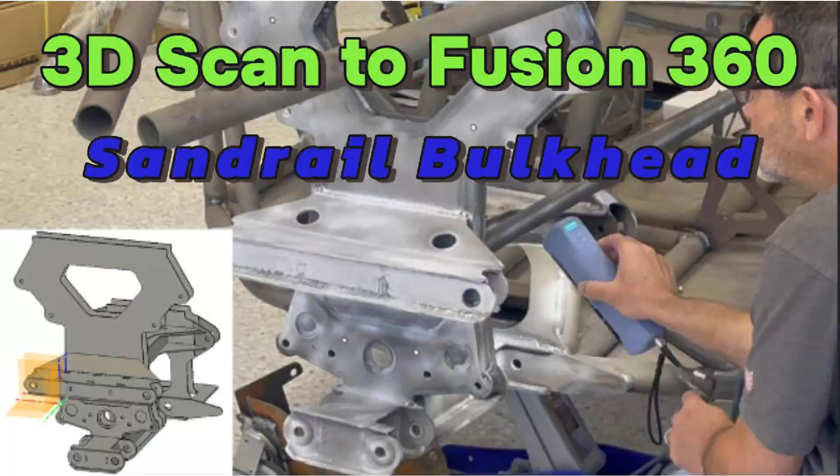All right, today we're using our Einstar 3D scanner to scan the bulkhead on this Desert Dynamics Sandcar. I'm not going to spend a lot of time showing the Einstar. There's a lot of videos on how to do the Einstar 3D scanning. We're going to quickly do the scan. I'm going to show you here scans showing up on the computer, and then we're going to show you how to get the mesh into Fusion 360.

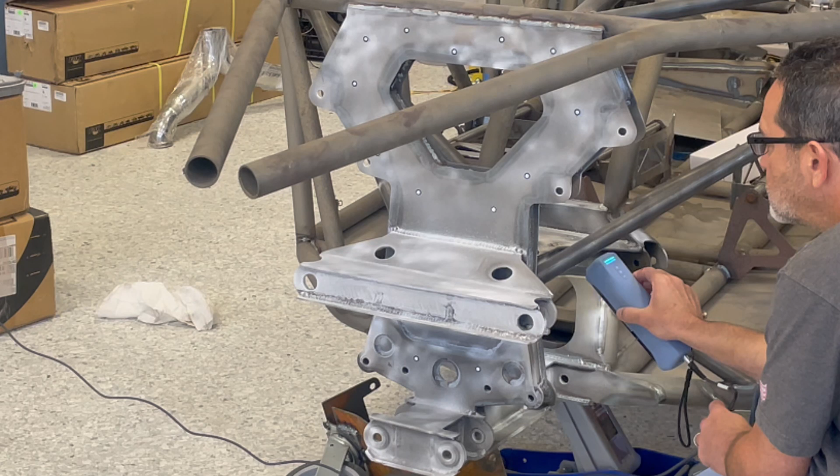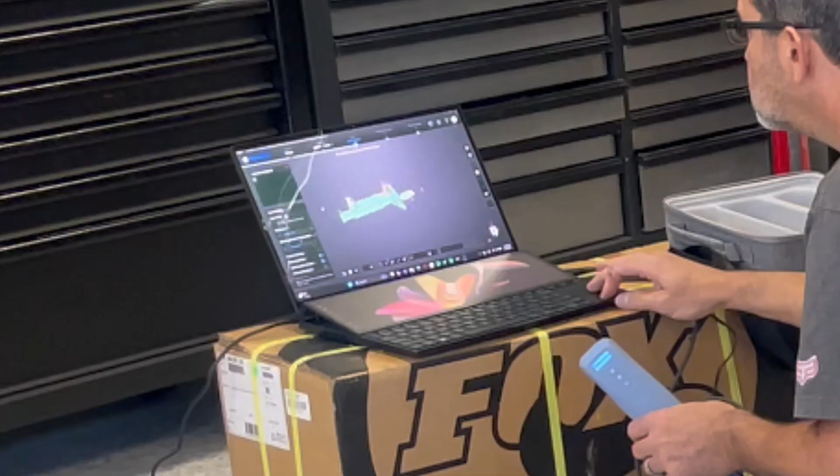So that's a critical component of getting it into Fusion 360 and figuring out how then to start making your components in Fusion 360. We'll just finish up the scan real quick, kind of go slow in some of the complex areas, get it saved into multiple files, and then we'll get going in Fusion 360.

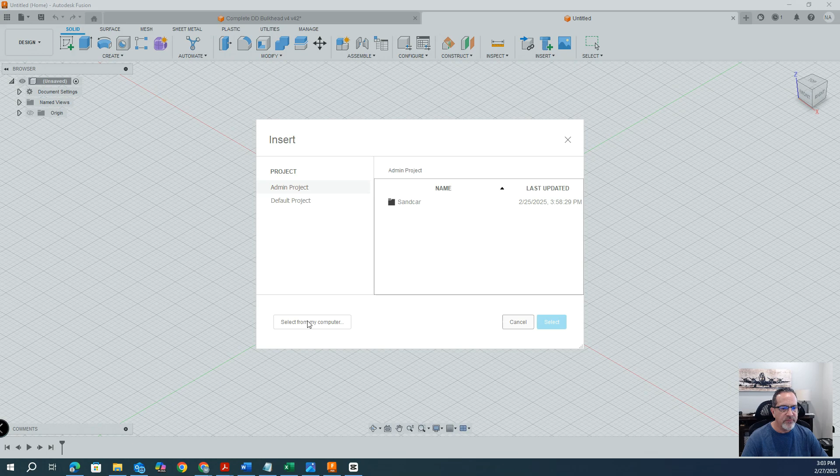Okay, now that we have the 3D scan saved, I'm going to show you how to get it into Fusion and get it to the point where you can work with it. So we're going to go up and we're going to do Insert Mesh, and then we're going to do Select from Computer. Look for your 3D scan. I have these broken up into a few different files just because they become really large otherwise. So let's just grab this one.

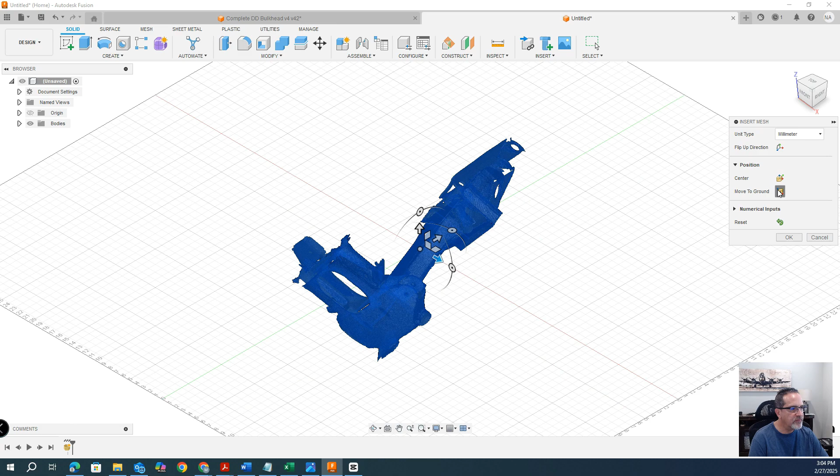Okay, you'll get this insert mesh screen over here on the right. Make sure that it's getting inserted the same that it was saved. So this was saved in millimeters. It doesn't matter if your sketch is going to wind up being in inches. My sketch is going to wind up being in inches, but the mesh was saved in millimeters, so we got to make sure it's in millimeters. We're going to center it on the drawing, move it to the ground. We're going to move it around afterwards anyway, but I'll show you how to do that.

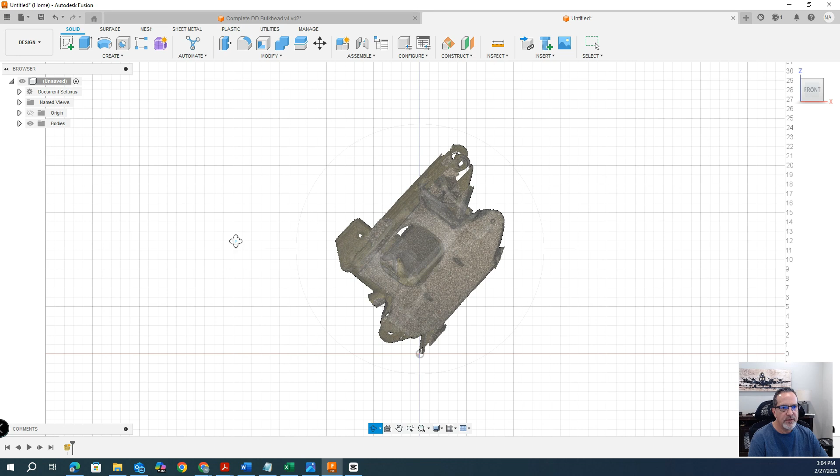Okay, so now our scanned image is in there. But you'll notice that it's not correct on the plane. So right now, if we draw on it, it's going to be very confusing. So what we want to do is go to the front here, and we're going to select this. We're going to move it. We're going to right mouse click, move or copy. And then that allows us to move this. And we're going to try to get it oriented first with that plane.

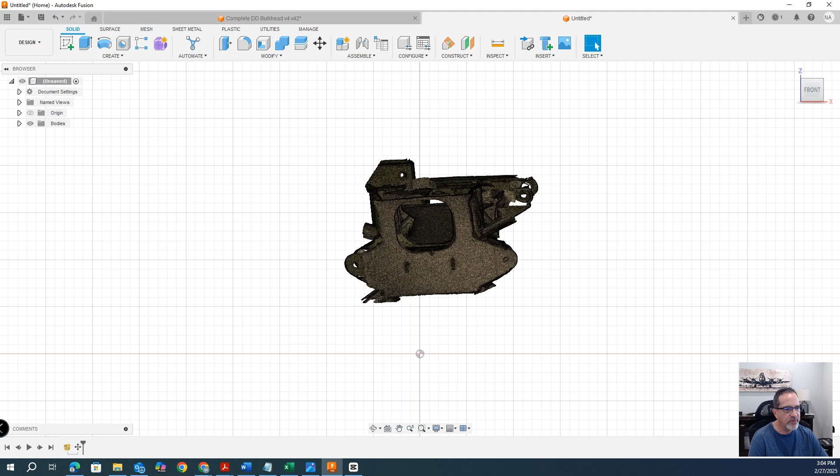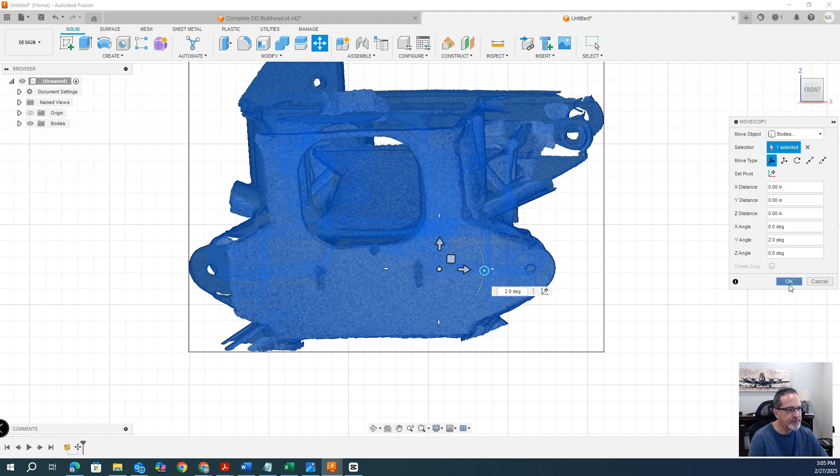And we'll just get it rough. It's probably okay to start. Zoom in a little bit. It needs to go a little bit more. So it's probably more like, come down here and do a fine adjustment. It's probably more 2 degrees. Yeah, that's probably good for now. We're going to jump to here. Obviously, that needs to be adjusted as well. So we're going to do it the same way on this axis.

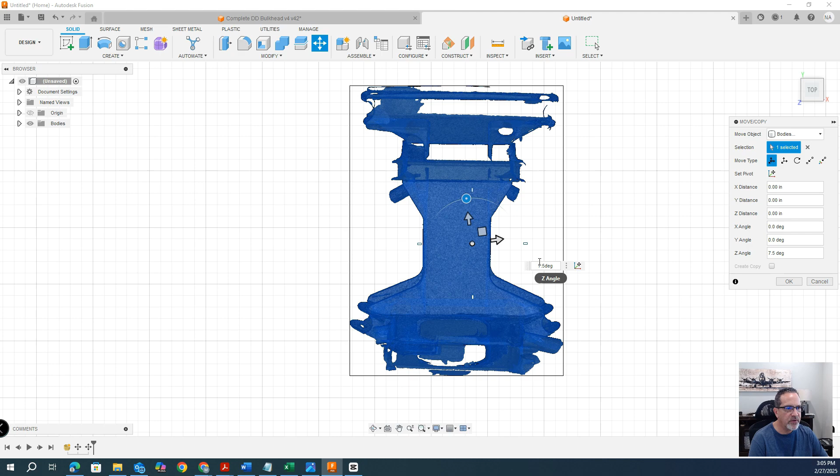So we're going to rotate. We're probably like 6 degrees, 7 degrees, maybe 7.5. So this takes a little playing around with until you get it right. And then we're going to go over here. So that obviously needs to be moved as well. I'm going to tell you, take your time getting this right, though. It will make your life much easier once you start drawing.

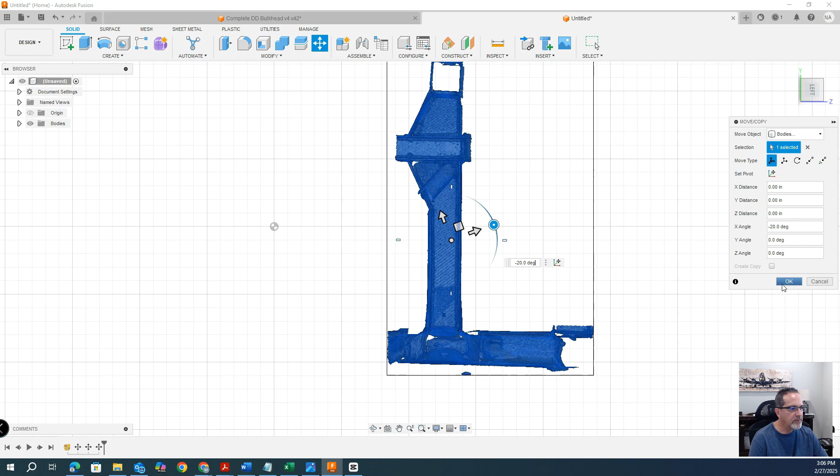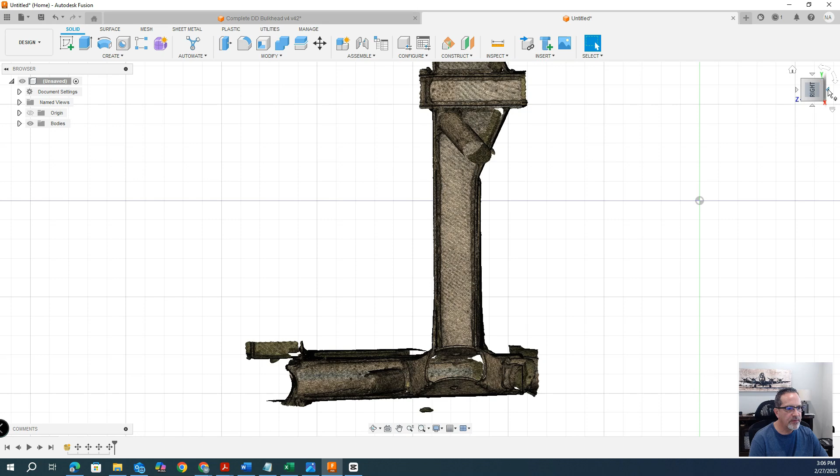So that looks pretty good. I usually use the grid lines as basis. So you can see our grid lines pretty close there on the front of that plate. Looks like our scan probably wasn't perfectly 90 degrees, but that's probably because the bulkhead's probably not perfectly 90 degrees, which is fine. We're going to correct that in our drawing. So actually, let me do selecting in here. Go back to the front. Okay, that looks pretty good.

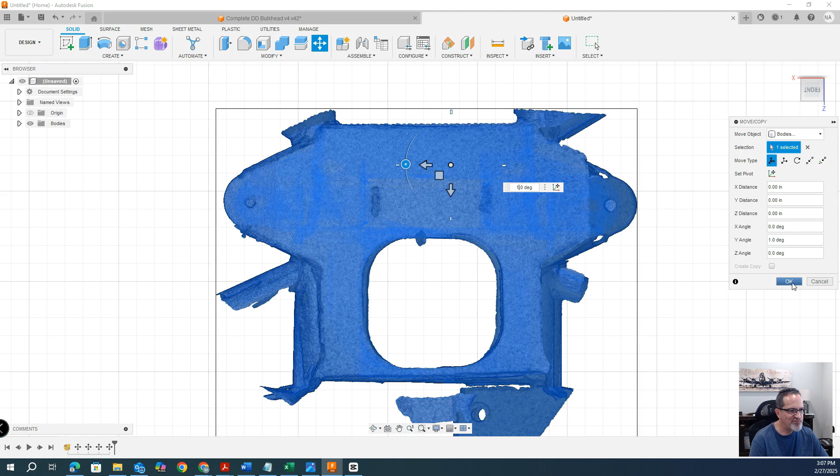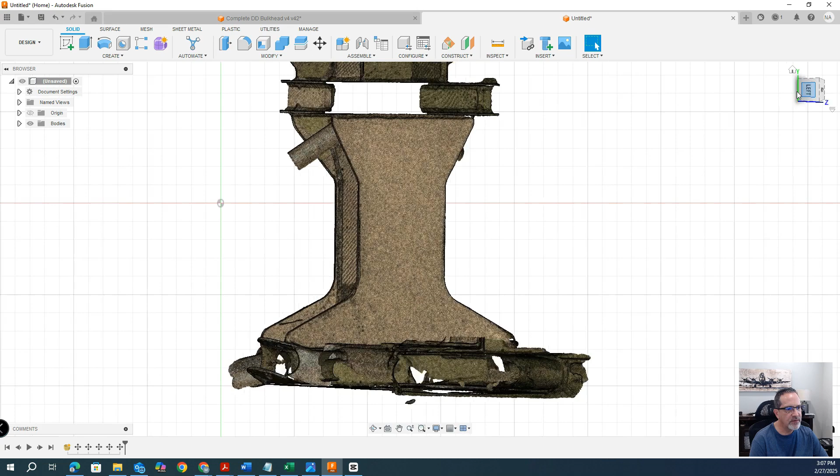And that needs to be adjusted a little bit, it looks like. So again, we're going to adjust this. Probably maybe 1 degree. Yep, that looks pretty good. Okay, so then once we have that, we're ready to start drawing. So we can also orient this. Let's see, this is actually the back. That is the top. So we have that right, looks like. And, well, actually, that's the top.

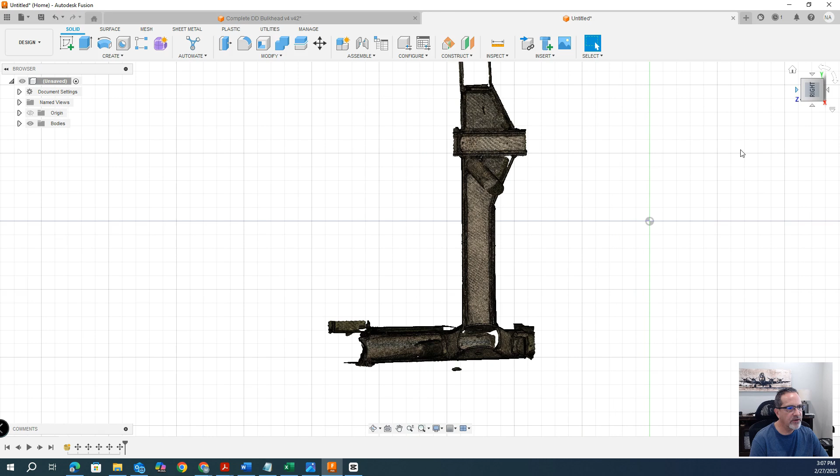So let's just spend a little bit of time getting that right. Otherwise, what's going to happen is once we start drawing this entire bulkhead, we're always going to come over here and refer to the top or the bottom, and it's just going to be confusing. So I'm going to come over here and do the same thing. Move copy. This time I'm just going to rotate this 180 degrees. Okay. So now that is our top.

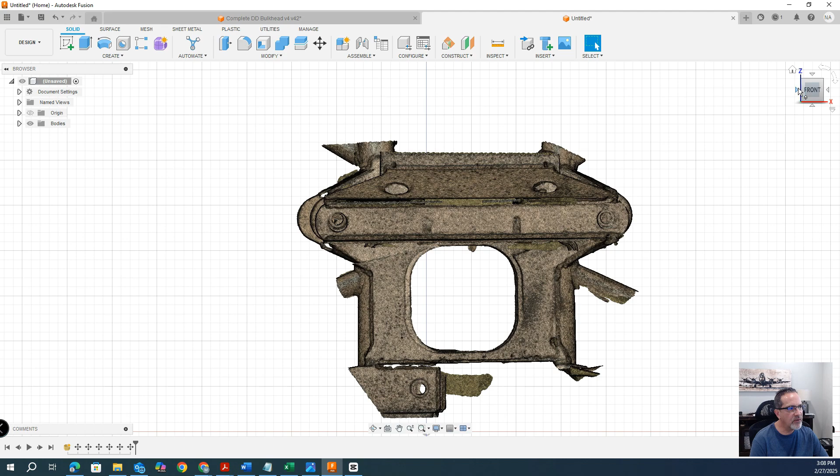Come to the front. I think that is now our front. Yep, and that is our back. Okay. So now we have it oriented correctly. I'm trying to go as fast as I can on this, so our video is not super long. We're going to start a new sketch.

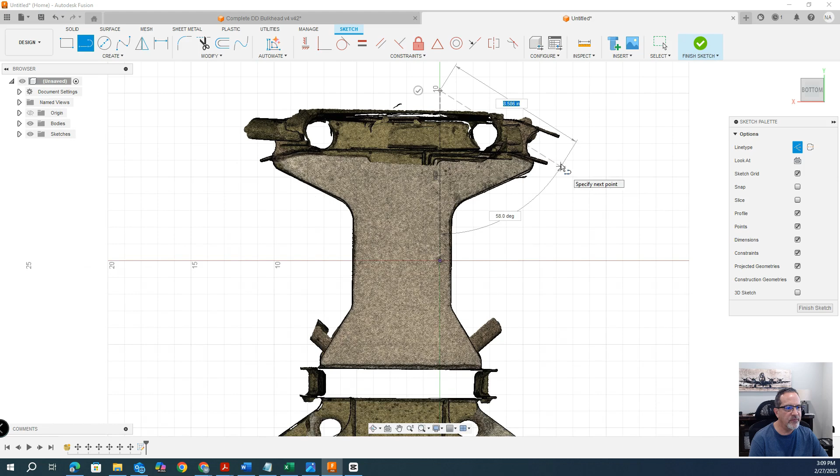Okay. I'm going to come in and do a construction line to get the middle. So we'll do a construction line over here, and I'm going to draw what is about the middle here. Oh, and the other thing too is let's get it centered with the drawing, the middle of the drawing. So we're going to do a construction line right along this middle drawing, and then we're going to move everything one more time.

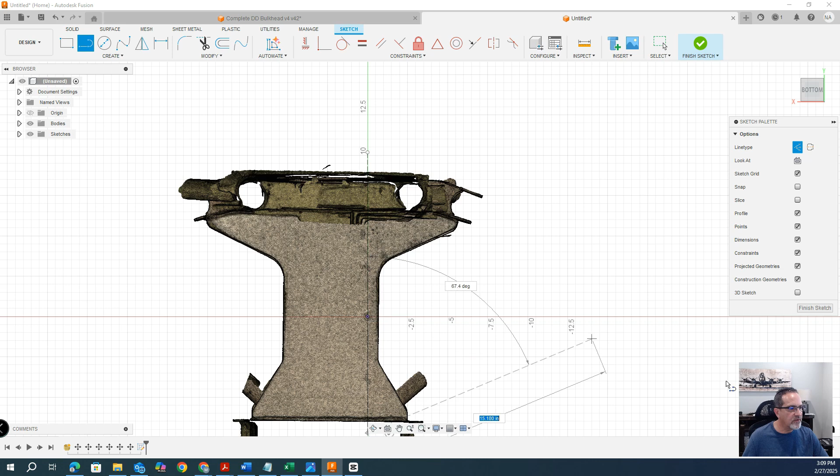So I'm just going to do another line here. We'll extend this line down so we have a nice long construction line. And the reason I'm doing this is because it's easier to see this center line when you're moving your object. Okay, now I'm going to do a select here. Now you're going to notice one thing's going to happen when I go to do the select. I got to move him, and I'm going to move this over to about the center line.

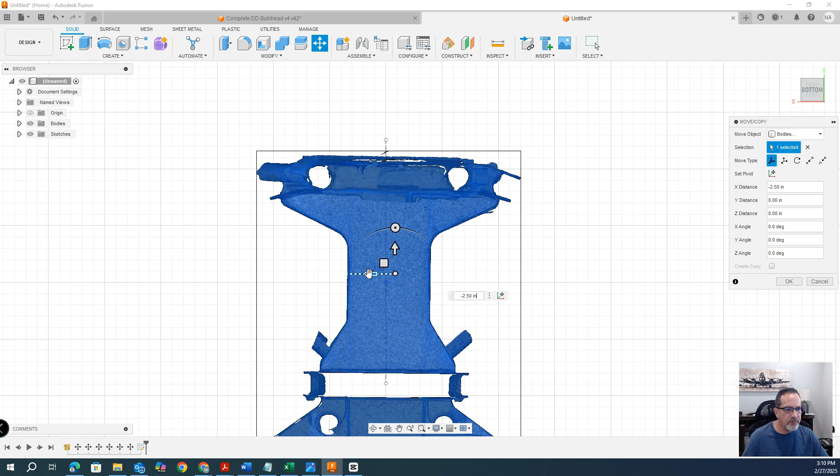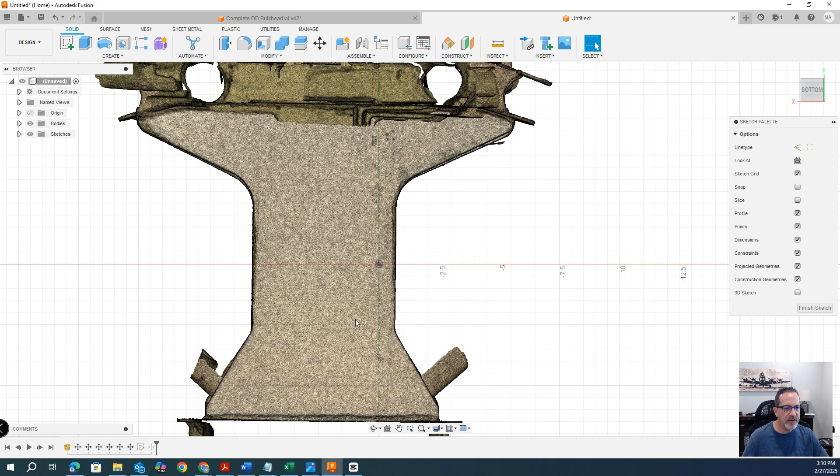If I zoom in, it'll make it so that I can drag it with more accuracy. And it looks about at the center line. I click OK. Now the one thing is when I go back into this sketch, because in our timeline we've moved this after we started our sketch, right? So if I go in and edit this sketch, what's going to happen? That guy's going to move, right? So I'm going to finish that sketch.

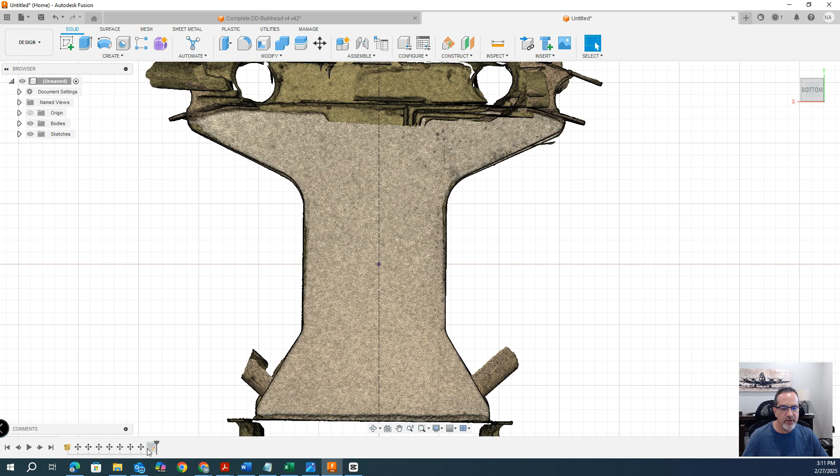In the timeline, I'm just going to move our sketch after our move to the end of the timeline, or let's just drag the move to before our sketch. Okay. So now when I go in to edit my sketch, that move's already occurred, right? So we've already moved the object. Our sketch is after the move. Okay, so now we can come into our sketch, and we've already got a center line. So that makes it good, makes it easy.

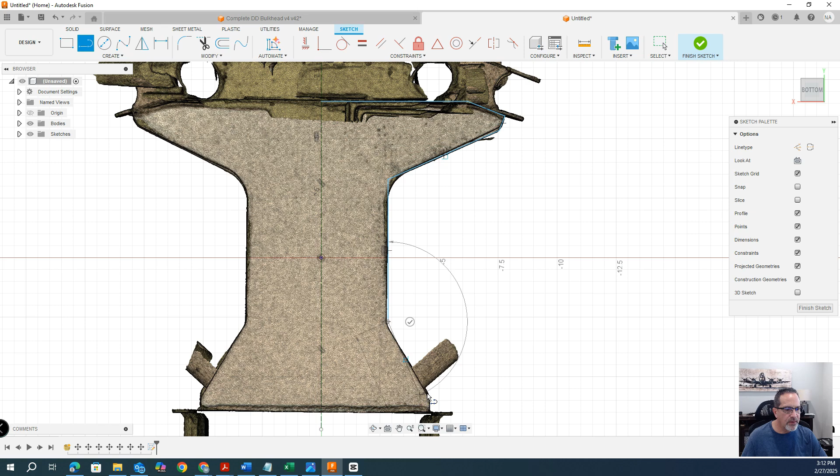We could draw a couple more construction lines here and make sure that that center line is actually in the center. But it looks like it's pretty close, so we're just going to keep going here so that we don't waste a bunch of time on this video. And we're going to draw some lines here for our actual drawing. I'm not too worried about my dimensions right now. I'm just going to get some lines on here, so I can always change them. Just kind of overlap over this guy. Okay, maybe about there. And then we're going to come back to our construction line.

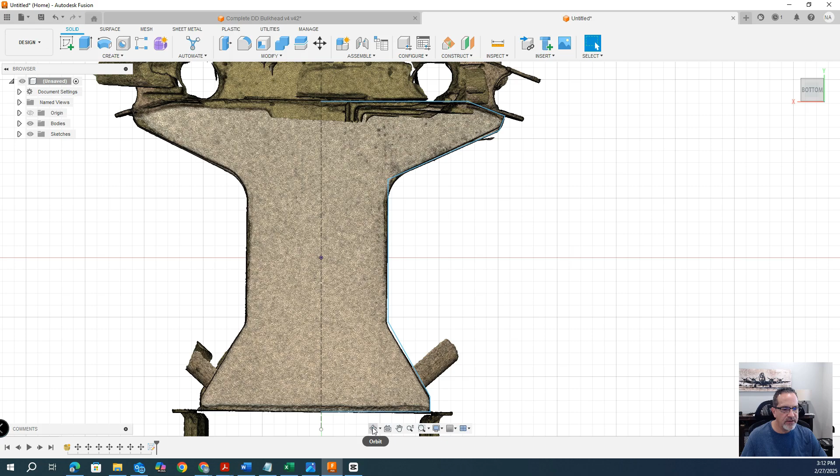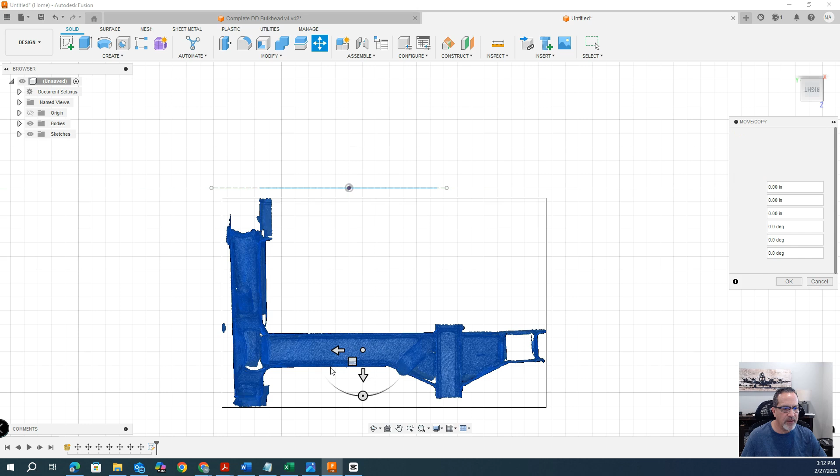Okay. One thing you will find sometimes is when you're doing this, if you can't see your drawing, that's because your 3D scan is above your drawing. So in this case, you see our drawing is way above our 3D scan. But if you have that problem, so your drawing plane is way up here, you can again just select your object and move it. So again, we're going to do move copy, and we're going to move our object way up here. So if we had it, for example, there, right?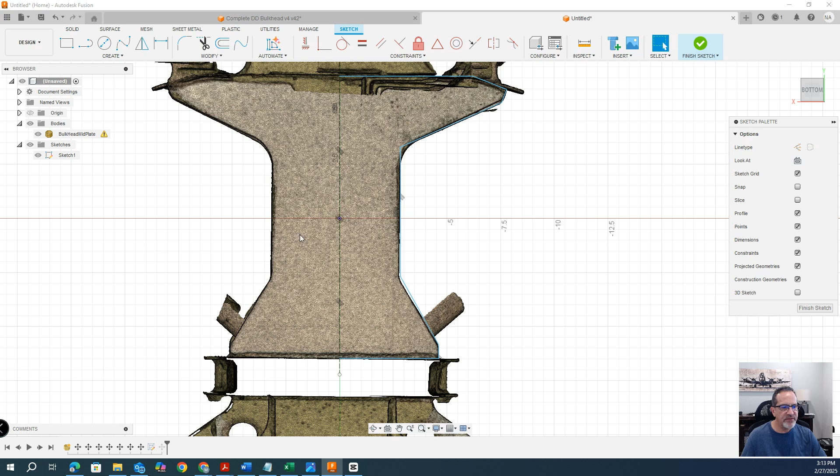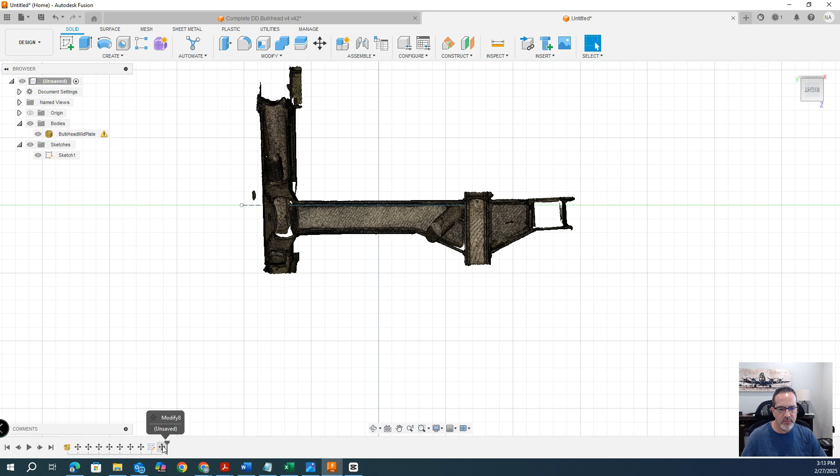And we go to edit our drawing, back into our sketch, edit sketch, it's going to be difficult to see our sketch lines because our object, our body, is actually above our sketch. Apparently I didn't put it quite above our sketch. No, I didn't. So let's go do that again. Finish. Oh, it's because our move, again, is after our sketch in our timeline. So if we were to do this and move that to there, you would see what I mean.

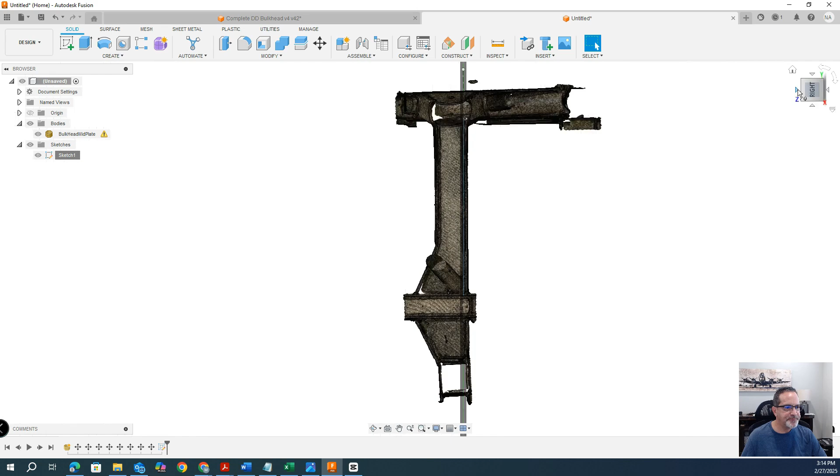So this is a very common issue. You'll notice now when we go to edit our sketch, I can't see my sketch lines, right? So if I come in again, come over here, and I say, hey, I just want my body a tiny bit below my sketch. So I'm going to move it again, just the tiniest bit below my sketch. So maybe like right there. Okay. Again, that's after. We're going to have to move it because it's after our sketch in the timeline, which is fine.

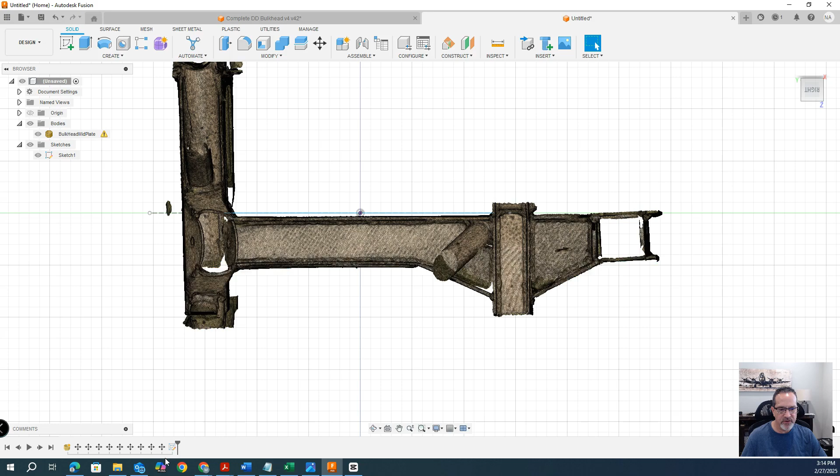We're going to come back up, reorient ourselves, edit our sketch. Okay, now we can see all of our lines. If we want to turn this body on and off, we can do that right here. So we can just kind of look at our drawing. That looks pretty good.

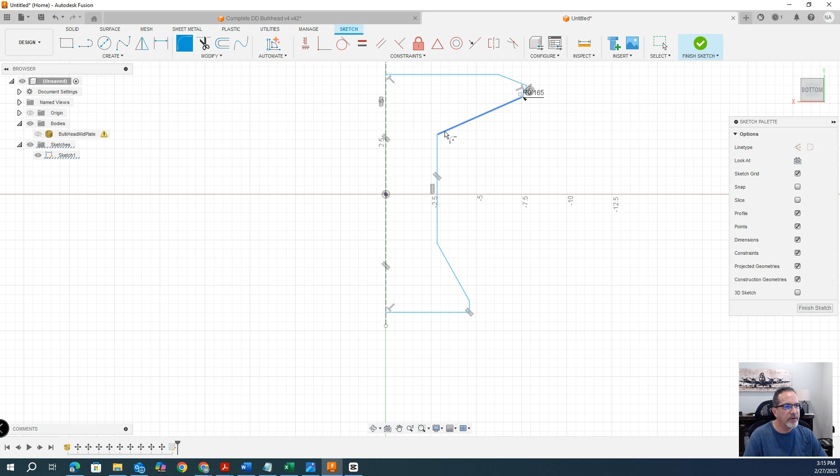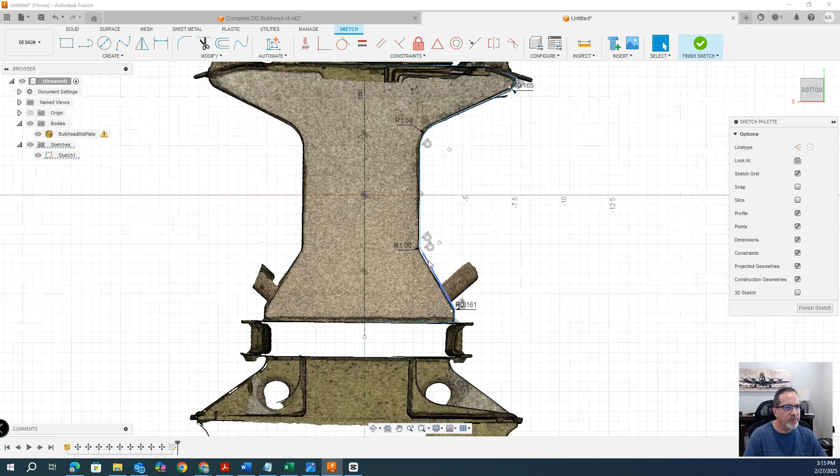Okay, so then I'm just going to come in. I'm going to use the fillet tool, and I'm going to kind of come in and do a couple of fillets here, there, and do one there. Kind of clean these up a little bit there, and then I'm going to do one here. I think that looks pretty good. Turn this guy back on. Looks pretty good. We could realign this guy to make it closer, but for the purposes of this video, you can see that that looks pretty good.

So now you probably wonder, why did I only do half of it? So I want this to be symmetrical. So whenever we're doing a symmetrical part, I always only draw half of the part, and then we're going to mirror it. So this is the mirror icon to mirror it. The way I usually like to do this is I pick the mirror line first, which is our construction line, and then we're going to select our object second.

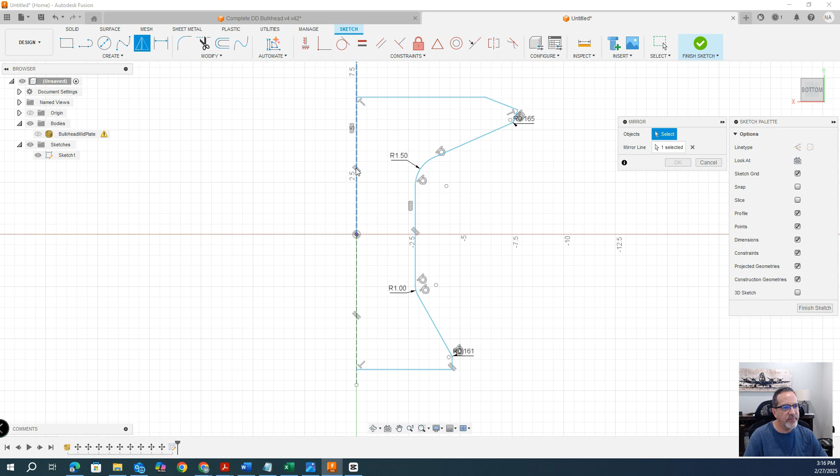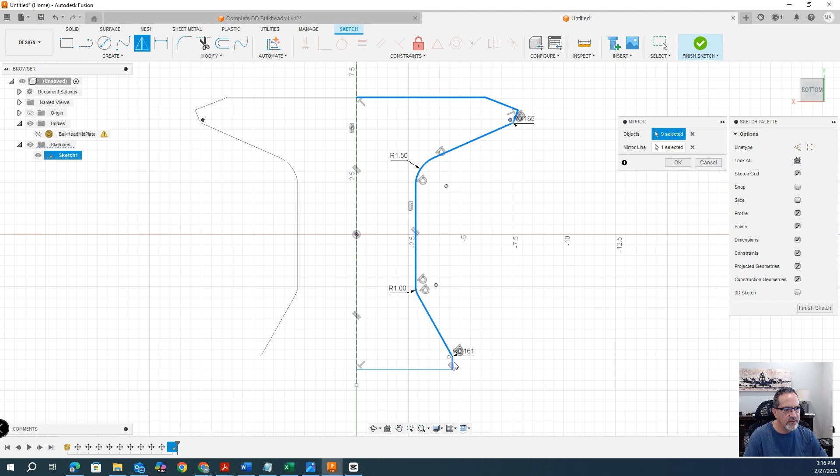And the reason for that is once you've selected your mirror line, then as you select your objects, they will automatically start to show up on the other side. The advantage to that is you can see if you've missed anything over there as you're selecting your objects. You can also just highlight everything and say mirror everything, but you're going to get all your constraints, all of your points and everything that you really don't need. Really all you need is your lines, right?

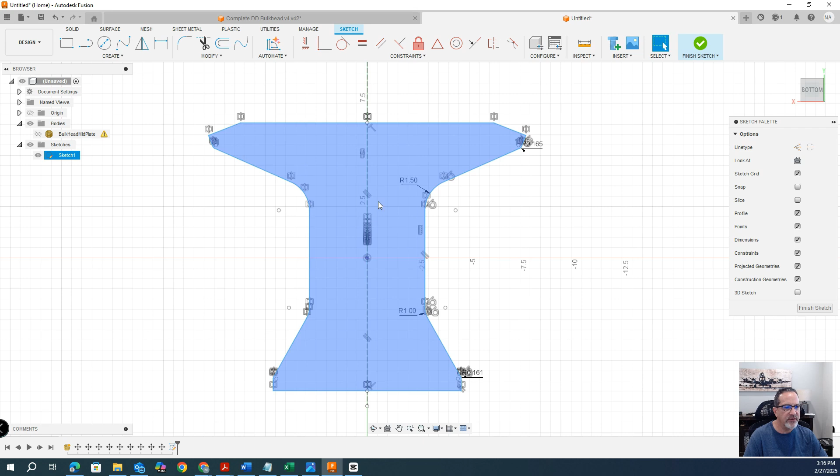So we've got everything. Looks like nope, looks like we missed one arc here. Okay. So we got everything. So we're going to say okay. Okay, and you can see now when I hover over it, how it highlights the entire thing. That way we know it's entirely closed object. We're going to say finish sketch. Now that it's finished, I'm going to highlight it. This is going to be a sheet metal object. So I'm going to come over to sheet metal. I'm going to say create flange.

And then once we do create flange, we already have profile selected. And I already have entered in all of my sheet metal rules from SendCutSend,

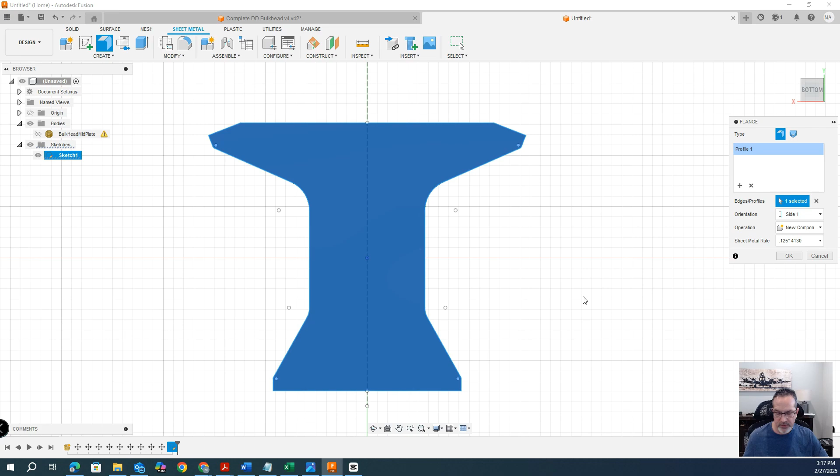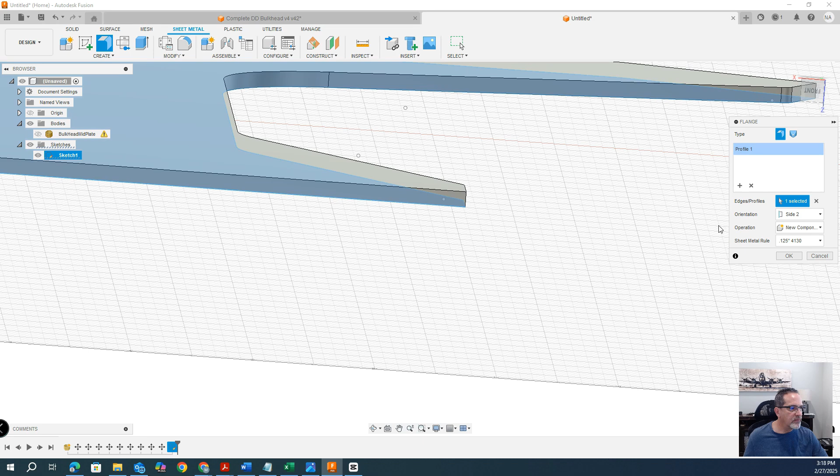So I'll show you as we roll over here. So right now, there is side 1, there is side 2, and then if we did centered, it would center on the sketch. Well, because we're working with our mesh bulkhead object, we really want side 2 so that it's away from the sketch, so that as we continue to make components, they don't start intersecting with that object. So we're going to say, okay, now we got a new component right here,

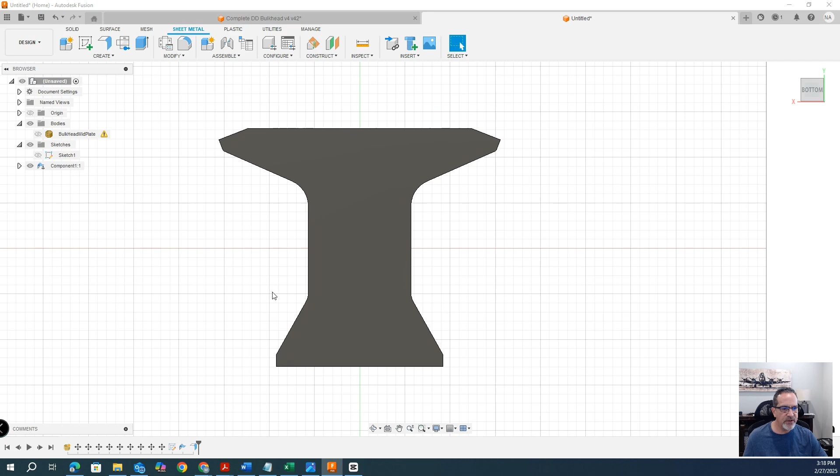and come up. There's our new component. We can turn our bulkhead back on, see how that lines up. It's a little off. We could have fixed that a little bit for this video. I think we're pretty good. And then we can rename our component. So I like to rename all the components as you get in a complex design. So we're going to name this top plate. It really helps. Okay, so there's our component.

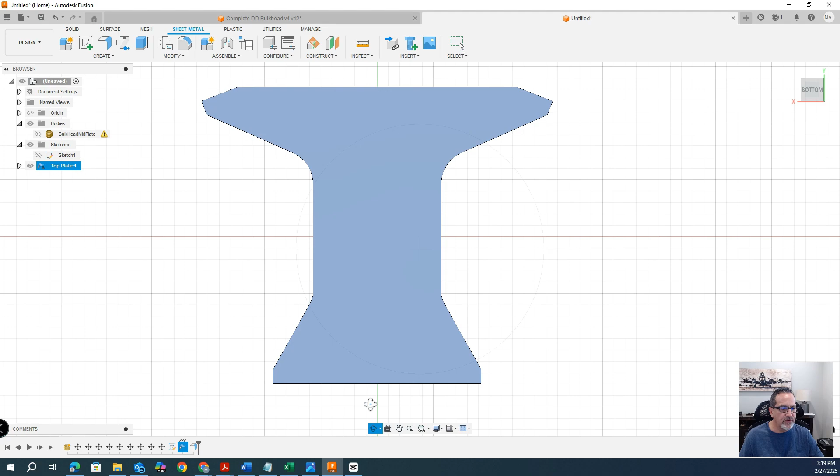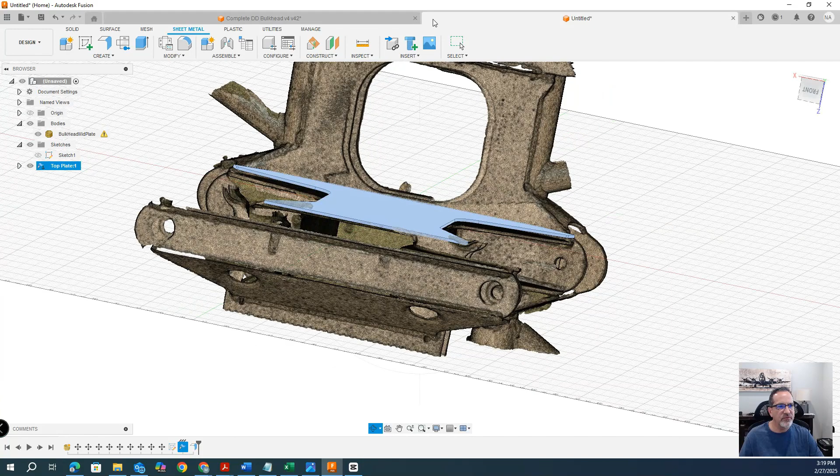And there we go. And as you turn on your bulkhead, you can see it fitting in with our 3D scan bulkhead. And you just work your way through these 3D scans if you're doing a complex one of all the components. So the idea is, we'll jump over to one that I've been working on for a while. So this is that bulkhead. So the idea is that you get to a point where you have this bulkhead recreated. And you may be wondering, well, the bulkhead's already on the car. Why 3D scan and recreate this bulkhead?

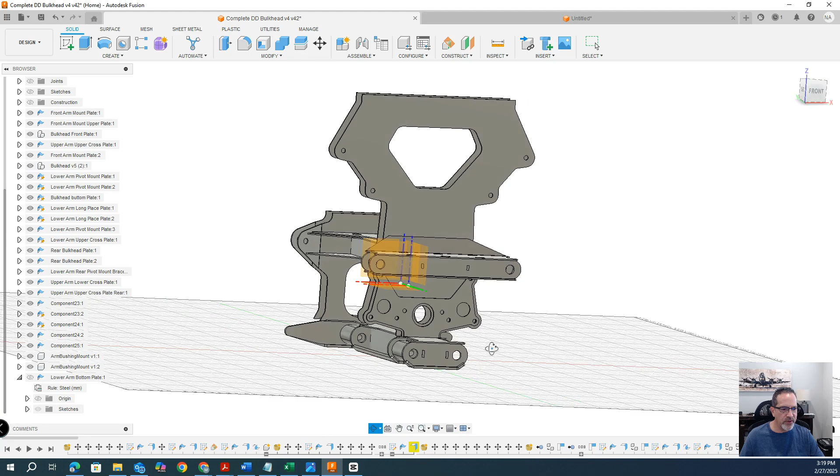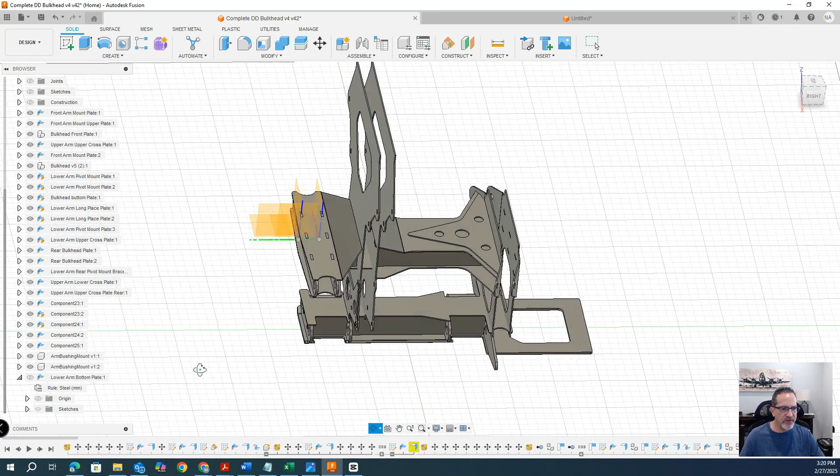So the reason we're recreating this bulkhead is because the next step is then to create the arms, the upper and lower arms that will go on this bulkhead. Actually then put the steering rack on the front with the tie rods and everything, so we can cycle the arms with the shocks, make sure we don't have any issues there, or make sure we figure out our bump steer and everything before we send a single piece to SendCutSend to have them cut the metal for us, and before we do any welding at all. That way, hopefully, we avoid most of the issues that we're going to have before we actually start any fabrication.